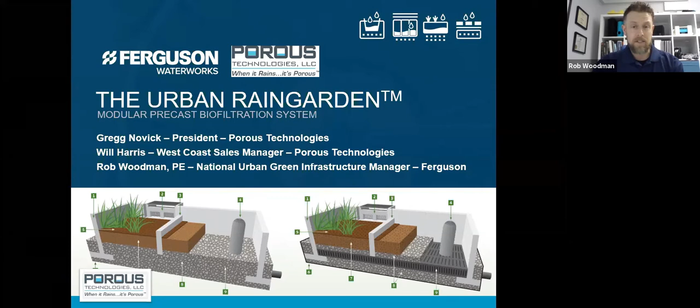In terms of today's presentation, we're going to talk a little bit about what green infrastructure is, chat about some of the typical challenges with incorporating green stormwater infrastructure into urban or city environments. And then I'll hand things over to Gregg, who'll talk a little bit about the great business he's built over the last couple of decades with Porous Technologies.

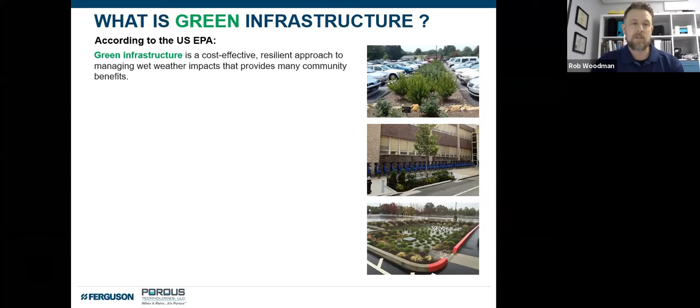According to the US EPA, green infrastructure is a cost-effective, resilient approach to managing wet weather impacts that provides many community benefits. As it sort of compares to a traditional gray infrastructure, when you're looking at conventional pipe drainage and water treatment systems, green infrastructure reduces and treats water at its source while delivering a lot of those co-benefits, or the triple bottom line benefits of environmental, social, and economic.

And then as it relates to green infrastructure itself, generally we're looking at using vegetation, soils, and other elements and practices to restore some natural processes required to manage water and create healthier urban environments. At a city or county scale, green infrastructure is a patchwork of natural areas that provide habitat, flood protection, cleaner air, and cleaner water. But when we think a lot about green infrastructure and the typical techniques, and I guess a couple of definitions for today:

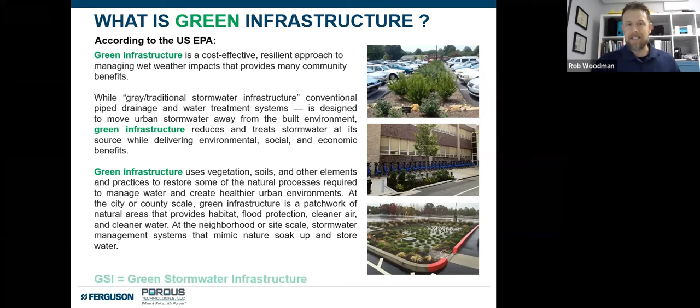GSI, green stormwater infrastructure. And then we use the word BMP, if that's a new one, that stands for best management practice. When we think about the typical techniques for green infrastructure, there's many of them, rainwater harvesting, rain gardens, planter boxes, alleys, green parking areas, urban tree canopies, these types of things.

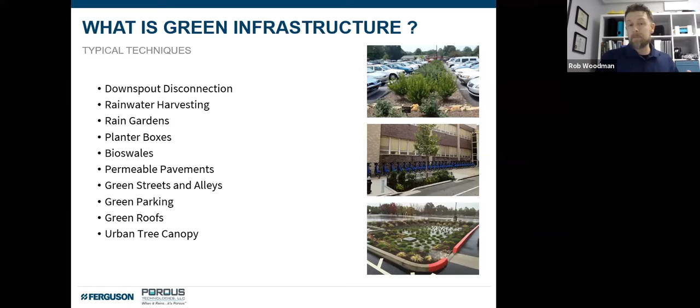And what I've found is that there's a lot of great data sheets out there and guidance for these types of systems, but a lot of them are kind of geared towards either residential applications or where you have a lot of space, but you don't always have a lot of space. When we get into the urban or the built environment, there are a series of complexities that make green stormwater infrastructure a lot more challenging to incorporate.

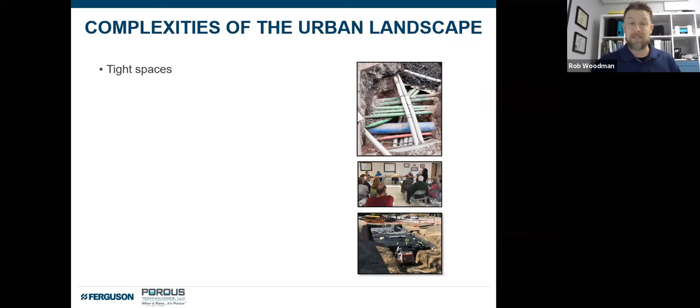You're dealing with tighter spaces, so less room to work, less room to get your system installed and done. You're dealing with working around existing infrastructure, so maybe other utilities and conflicts, or maybe even new infrastructure and utilities that you're putting in at the same time that maybe this green infrastructure system is being deployed.

You may be in a green streetscape where construction may be affecting local business, and where the timeliness or short project cycles are really important, so these businesses can stay open and continue to make money and grow their own businesses.

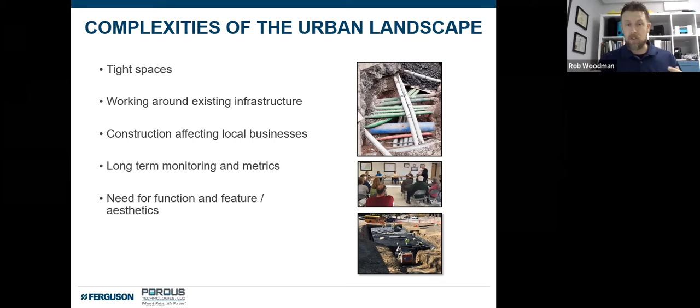And then a lot of these city programs have the need for long-term monitoring and metrics. When it comes to green infrastructure specifically, or surface green infrastructure, there's a need often for these systems not just to be functional—process the stormwater, treat it, or store it and send it on—but also to have that high aesthetic value, to be that feature.

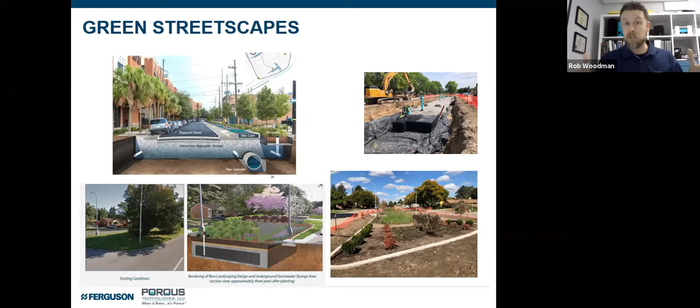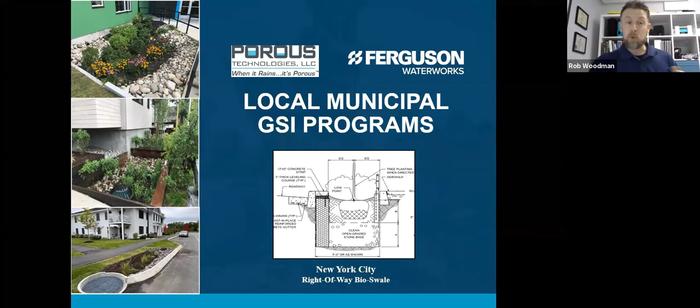And along with any sort of stormwater BMP comes maintenance challenges. Now, every city is kind of doing their own thing, looking at their city right-of-ways, their green streetscapes, and saying, how can we fold these components in? Everybody's embracing them in slightly different ways, and there are many local municipal GSI programs throughout the country looking at green infrastructure in different and some similar ways.

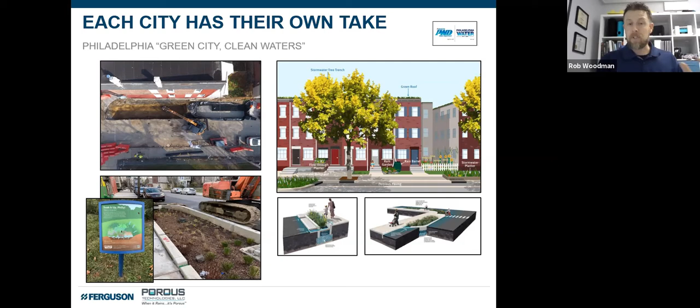When we look at Philadelphia, the Green City Clean Waters program is a very high-profile program that's got a lot of attention. They have a great program with a lot of different types of technologies and BMP styles—stormwater bump outs, deep tree planting areas, rain gardens, subsurface storage pits—these types of things to account for the different challenges from one street to the next.

New York City—I'm sure many of you are familiar with the program there—traditionally makes a lot of use of the right-of-way bioswales and infiltration basins, deploying a very similar kind of look, that patchwork, throughout the city. So, simplifying it into a couple of key options, obviously comes with some challenges associated with curb line BMPs, like trash and debris.

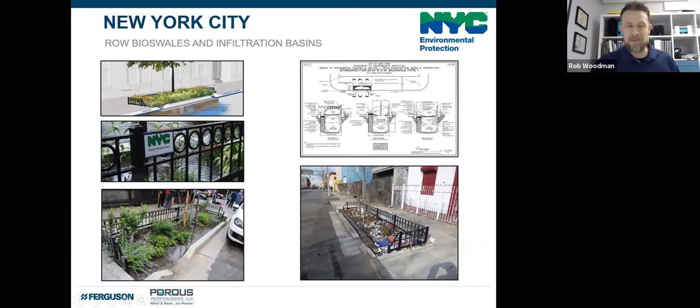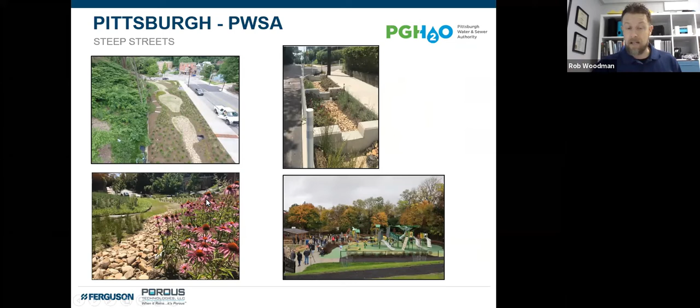Then you go over to Pittsburgh, PWSA, a great little program there on the green infrastructure side. Pittsburgh has the added challenge of having very steep streets, so it's a very different dynamic compared to Philadelphia, where a lot of these BMPs end up becoming terraced with internal baffle walls to separate the stormwater into little chunks as you work your way down the street, in a variety of really creative ways. A lot of folks in Pittsburgh have incorporated GSI features into typical public improvement projects—you can see a really nice little park project here.

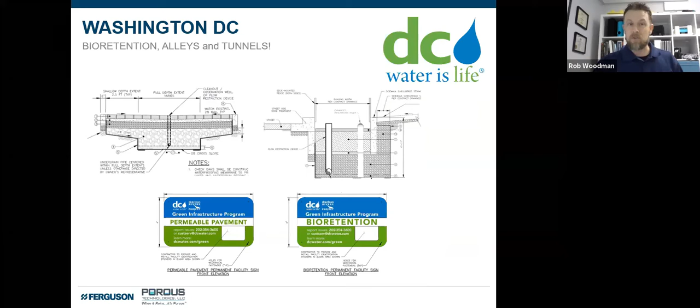And then DC—there are programs all over the world, I'm just focusing on a few today—but DC's primary GSI BMPs are permeable pavement, or permeable alleyways, and also centerline or curb line bioretention systems. So it's interesting to see all these folks navigate different ways to deploy these types of systems in their areas. At Ferguson Waterworks, we've spent a while developing a suite of solutions to address a lot of the key challenges in this space.

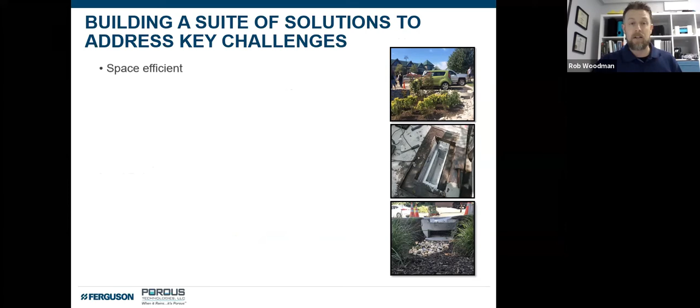So we know that whatever system we bring to the market, we need to be space efficient—that's so important. We need to be versatile and flexible, able to work with site-specific constraints and challenges. We can't be just a fixed shape or size. We need to be high performance, whether that's for water quality treatment or structural performance, whatever that may be.

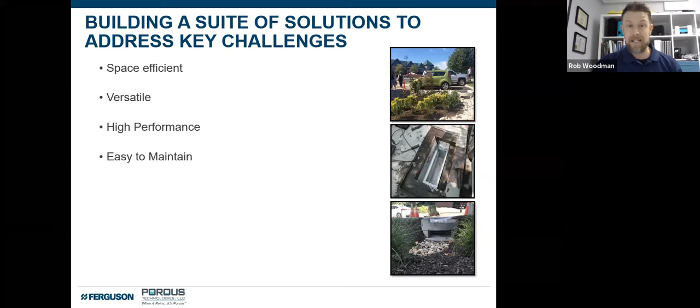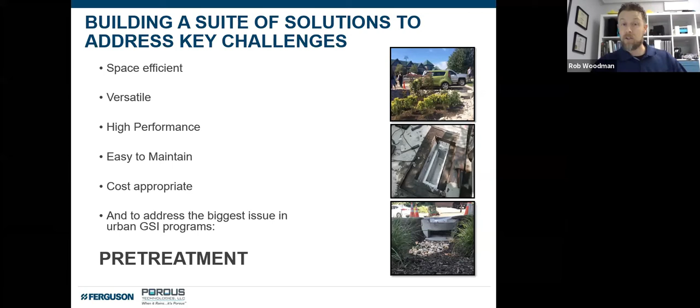Easy to maintain—maintenance is such an important part of the conversation, and Greg's going to share a little bit about his experience and journey learning more about what it takes to maintain these types of systems. And then, of course, cost appropriate. These are the pillars we're working with. The final one, which has probably become one of the biggest things I'm seeing in urban GSI programs, is the need for better pre-treatment to protect a lot of these curb line BMPs so they continue to function, maintenance is easier, and we increase the longevity of the primary BMP asset directly behind that pre-treatment.

At Ferguson, we divide our stormwater products and solutions into four primary categories: space-efficient storage, filters and screens, media and biofiltration, and finally alternative surfaces or permeable and porous surfaces. We're going to be focused on the media and biofiltration segment today.

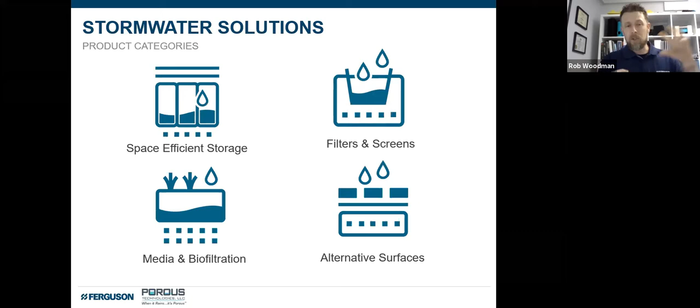When we look at these different buckets that we can pick from as engineers, landscape architects, designers, municipalities, oftentimes folks are just using one, just looking at the storage, just looking at the filters and screens, whatever it may be. But you can also put those things together.

What's really exciting with this Urban Raingarden that you're going to see today is it really emulates a lot of the importance of pre-treatment, treatment, and having all the framework and pieces that you need to have a fully functional urban stormwater BMP. With that, I'd love to hand it over to my friend Gregg Novick to talk a little bit about the great company he's built over the last couple of decades.

Well, thanks Rob. Great job setting the table today on the background on why we need not only biofiltration, but also why we need to focus on the urban setting where we have tight sites and it's difficult to find the space. I'm going to take a step back and give you a history.

I want you folks to know that this product, while it seems very simple, there's a lot that has gone into it. It wasn't developed in a vacuum, and we have a lot of experience.

Through that direct experience working with green infrastructure programs, especially here in the Northeast—I'm sitting here north of Portland, Maine right now—we were able to take that experience and recognize, looking at other GI and LID programs throughout the country, that we've got something that might work all around the country, not just in the Northeast.

So let me talk about the progression. Porous Technologies, we have a couple of companies. We actually have an inspection and maintenance company. About 15 years ago, I started Stormwater Compliance, which is a post-construction stormwater inspection and maintenance company.

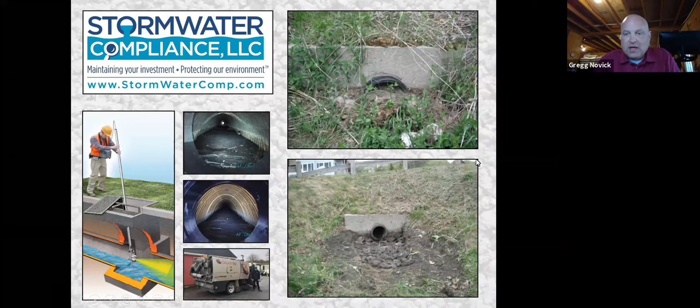We're headquartered up here in Maine, and we've run into a number of customers that call us with issues regarding porous pavement. Porous pavement is becoming more and more popular, especially here in the Northeast, but people are running into issues with it.

So what we did was develop our own maintenance equipment. This is called the Stormwater SUV, a ride-on vacuum machine good for alleyways, small areas, tight areas—we use a Stewart Amos. We also own a fleet of regenerative air machines for larger areas, like parking lots, and for those we use a Stewart Amos regenerative air machine.

We even developed a deep cleaning pickup head that we can place onto the Stormwater SUV that attaches to a Vactor truck. This is a whole other presentation we're happy to do for your office someday, but we kind of became the go-to porous pavement folks.

We never got phone calls saying, 'Hey, we've had porous pavement for 10 or 15 years, it's working great, can you come inspect and maintain it?' We typically got calls saying, 'We've had porous pavement for 10 years, we've never done anything, the municipality finally came and looked at it and said we probably have to rip it out—it's plugged.' So we were able to come in and help them develop methods.

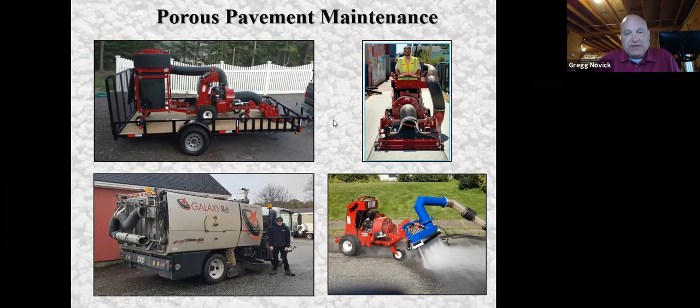So we came up with an idea called Stormcrete, which is a precast porous concrete slab. I'm not going to spend much time, or really any time, talking about this today, other than just to introduce it and let you know it exists.

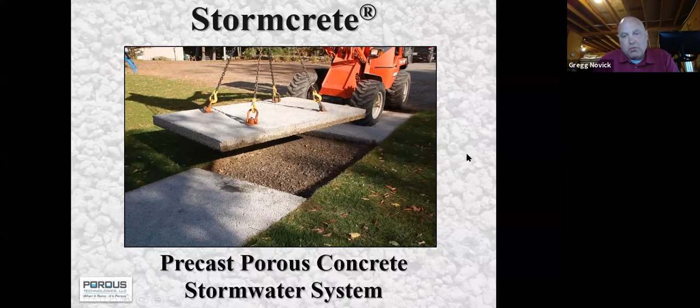Now we're manufacturing porous concrete under controlled conditions in a plant. The slabs have lifting points in the surface and they're removable and replaceable. So between Rob, myself, Will, and the rest of our team, we're happy to come speak to your group one-on-one or as a group about the Stormcrete product.

Of course, with porous pavement, we do parking lots, all the typical applications. Here's an alleyway we did in Anaheim. I like to show these sidewalk applications too—this is some New York City work we did.

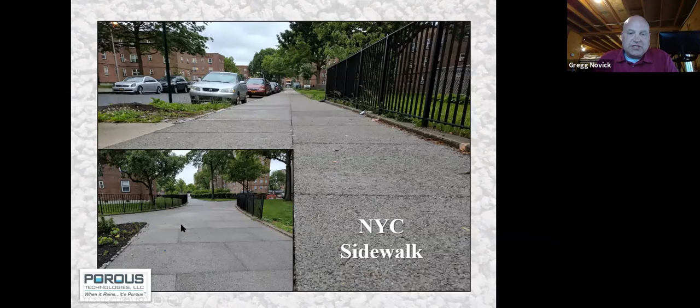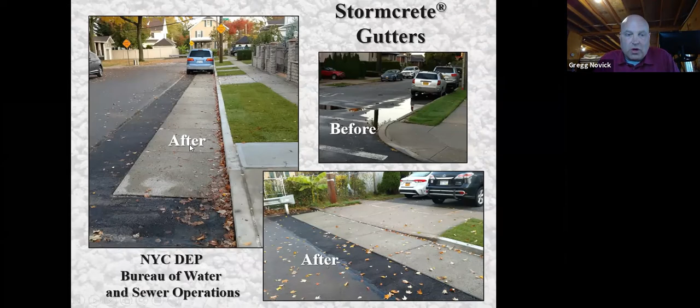This is my lead into how we evolved into a bioswale or biofiltration company. Through all our experience with more New York work, they're developing a gutter line application. They're starting to run into problems with conflicts in the sidewalk behind the gutter line, so now they're looking within the right of way for ways to get rid of their stormwater, looking at porous pavement. We've spent 10 years working with New York City in their GI program, and they've even developed a standard for precast porous concrete pavement in the gutter line.

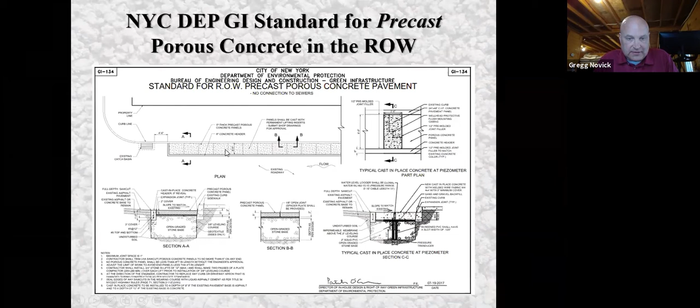Through our experience working with contractors, getting demonstration projects and working with the city, we were very involved in the entire green infrastructure program in New York, and recognized our contractors were struggling in the field pouring these in place. They now have about 8,000 to 10,000 assets built in New York. They had contracted to build hundreds of bioswales in a 9 to 12 month period, so they were challenged. We recognized the issues and developed a solution.

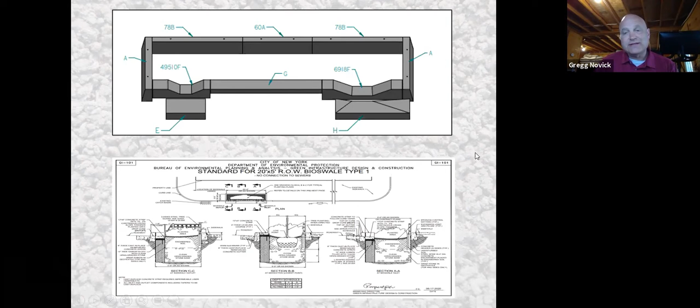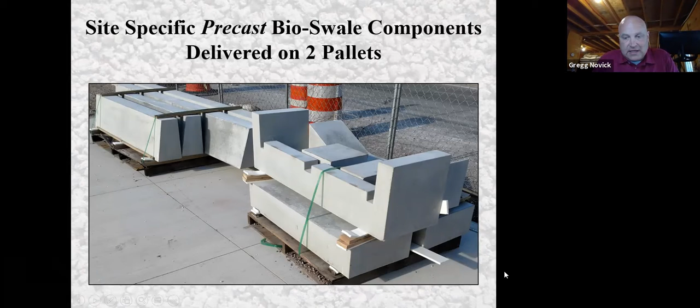We actually precast all the parts to the New York City bioswale for them, and the contractors liked it. We ended up supplying thousands of these into New York City over the last few years. We have the advantage, and the contractors liked that we were able to palletize and place all the bits and pieces on a couple of pallets for a bioswale, and they were able to just assemble it in the field.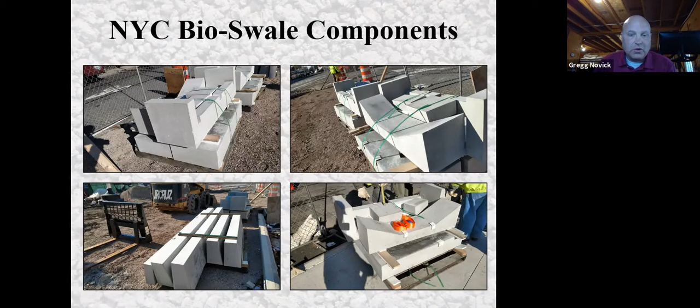Again, these are live streets. These are retrofits, and they need to get these streets open quickly. You've got these open pits until they get the concrete in and cast in place and cured, so if a storm comes through, you've got these open holes. By going with precast, they were able to install and close up the hole very quickly and get the streets back open. This really turned out to be a great thing.

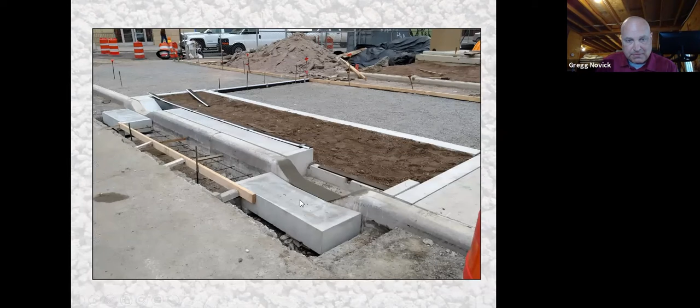We had the advantage. Here's a couple more pictures in New York, showing some of the parts we provided. Other than the curb here, we provided all the precast pieces for the bioswale.

So now we started looking around the country and said, hey, we know what's going on in New York. Here's a picture of New York's design, but now we're seeing others where we've got these straight walls. New York had straight walls initially and started having issues with settling and the walls tipping a little bit, so they flared out their walls. A lot of these other designs really just have straight walls. We had the advantage of being able to study all these different systems, and we kind of took the best of a number of worlds.

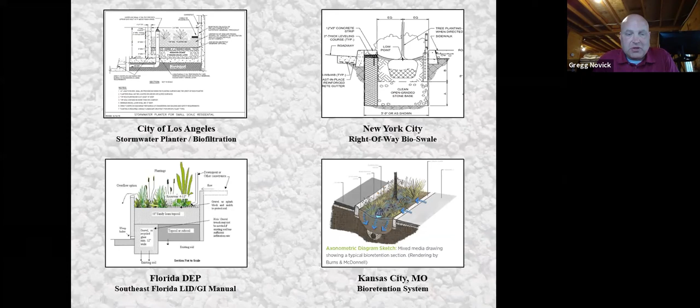We looked at Los Angeles, we looked at New York, and figured we want to make sure that whatever we do will fit into that. Lo and behold, once we designed it, we realized it works for just about every municipal LID or green infrastructure manual with regard to their biofiltration systems, or some people call them planters. So the Urban Raingarden was born.

With the Urban Raingarden, what we've done is created our own wall. We'll get into the details, but we've created a T-wall so that we can resist any settling or tipping. We have knockouts within the wall to allow roots out if we're using it for trees. There's a number of features that Will's going to go into right now.

I just want to give you the background that we've been doing this a long time. We started with a maintenance company, and with an eye for maintenance, we recognized the need for pre-treatment, like Rob discussed, so you can concentrate all the pollutants in one location and have one easy place to clean them afterwards. Through all our maintenance experience, we kind of developed that porous pavement product, and from that it morphed into a second porous product for us called the Urban Raingarden.

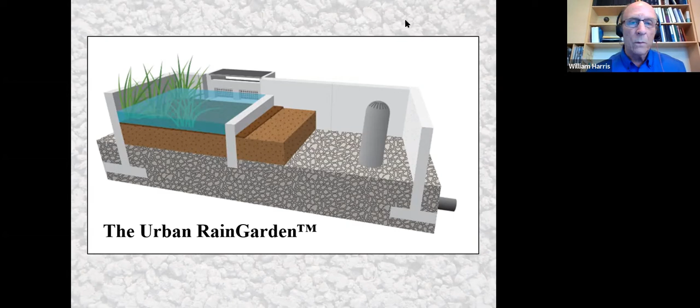So a little bit about the Urban Raingarden, let me get rid of this screen up here for a second. I'm going to take you through the features and benefits of the Urban Raingarden, and a little bit about the West Coast perspective as well, so you can gain an understanding of how this system was developed and why. The primary purpose of the system is to give and deliver a system to an engineer or contractor that's simple to design, has different options, and is non-proprietary.

This system can be applied in any jurisdiction across the country, as Greg alluded to, as something functionally equivalent to all standard types of bioretention system designs or guidelines, whether it's in the city of LA, LA County, the San Francisco Bay Area, New York, or Virginia. The beauty of the system is that it offers a number of different options that I'm going to take you through briefly.

One major option is the precast T-wall sections, which we'll get into in more detail in a moment. Also, as Rob mentioned earlier, as well as Greg, one of the major issues and challenges around maintenance for any rain garden system is treatment, pre-treatment, and maintenance.

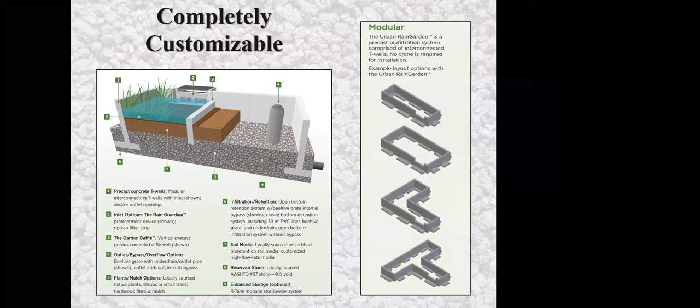I think you may have frozen. How's that? All right, we're in the interconnecting wall now. Is that where we want to be? Yes. Okay, good. I'm sorry.

Okay, getting back to the interconnecting T-wall—this is probably one of the major features of the Urban Rain Garden. The T-walls we design are precast concrete walls that are 6 inches thick at the top and the edges, and on the bottom we have an 8-inch base, so that it can offer a very stable location. They're connected by a turnbuckle, which allows for different configurations and allows the walls to be interconnected.

The footings actually prevent any type of settling, which is why they're 8 inches thick. There's no crane required, so it makes it very simple for a contractor to place the T-walls in the ground.

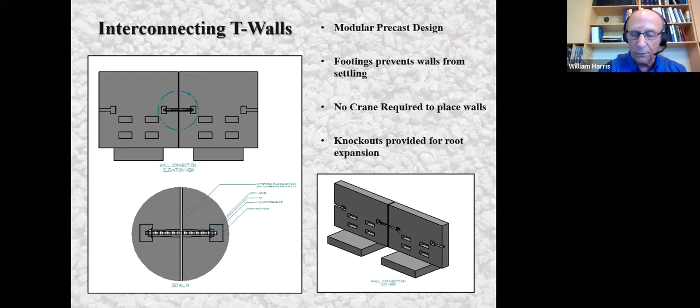We also offer the option of knockouts for the allowance of larger trees or shrubs for root expansion, or if you don't want to use the knockouts, we don't have to create them either. The walls actually come in two different sizes, four feet long and six feet long, and they can either be three feet high or four feet high, so that your dimensions and sizes are not dependent on having built all these different sizes of walls.

Using two standard sizes makes it very easy to design any shape, length, width, or size of system that you desire. This is showing an illustration of the interconnected T-walls placed on a radius, so you're not limited to having to make a rectangular type of design or a box design.

If you want to create a radius, you can do so with the actual interconnected T-walls. We do have an example of a general detail here, but this is not the only detail we have available. We offer free engineering support services at Porous Technologies, and we want to work with the engineering community so that we can provide them with a design detail that specifically fits their particular project application.

With the Urban Raingarden design, the basic design features are shown here, so that if you wish to incorporate an enclosed system with an underdrain and also with a beehive, you can do so, or we can leave it without. All of these other optional features will go through that being incorporated in a final design, but we do have general design details.

We also have a sizing guideline available for engineers to review that can then allow for the actual sizing features to be able to capture a particular volume or flow that may be required for capture in that jurisdiction. Those design details can be provided by us as long as we have the basic information on what the volume capture requirements are for that particular location, or if you have a site plan that we can work with and provide you with that particular design.

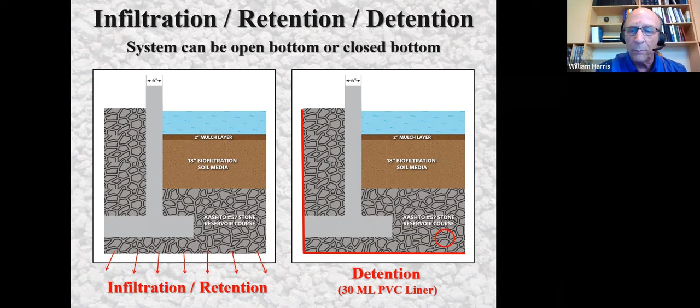We're just showing 18 inches here as an example, very typical of a lot of locations around the country. But if you want to make your biofiltration soil layer 12 inches or more, or 24 inches, you have that ability to do so. And then, of course, your mulch layer goes on top. Your ponding depth can vary as well; it doesn't necessarily have to be at 6, 9, or 12 inches. It all depends on what your site conditions are and what the local municipality allowance and limits may be. So we give that complete latitude to the engineer.

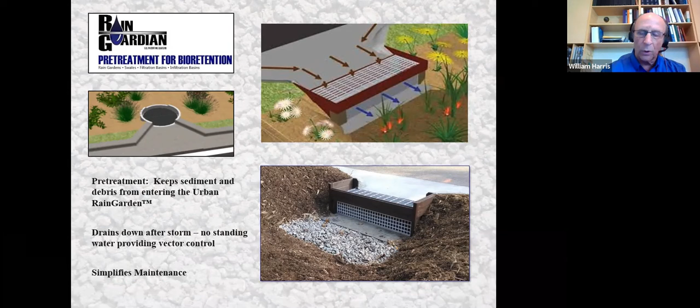Rob mentioned earlier about the need for pre-treatment. We believe that is really a strong philosophy that we incorporate into the Urban Raingarden. We actually offer a device called the Rain Guardian, which is a pre-treatment device for bioretention systems generally, from a company based out of the Midwest. We distribute their products on the West Coast. The Rain Guardian is a great pre-treatment device for capturing gross pollutants like trash, debris, and sediment.

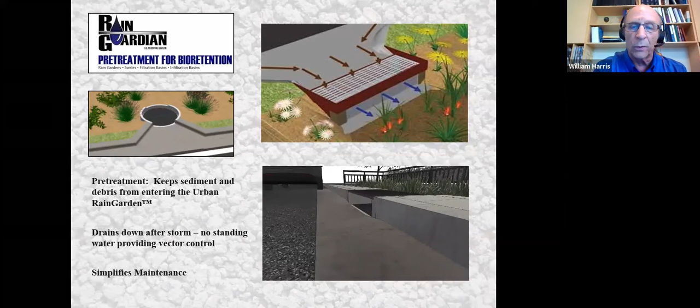It can be incorporated upstream of the Urban Raingarden so that as flows enter along, let's say, a curb line, you'd be able to convey that water through the Rain Guardian first, so that the trash, debris, and sediment—gross pollutants—are captured initially before water can continue through a filter screen and go into the actual Urban Raingarden.

This is a great feature for those who are concerned about maintenance of a planter system. Here, you'll be able to incorporate a pre-treatment system that would be able to be maintained right there at the curb line or in a parking lot area at the entry of the rain garden itself.

The garden baffle. It's something that we invented at Porous Technologies, and Gregg Novick spent a lot of time in the design of this. This is basically taking a standard stormcrete precast porous concrete panel and turning it vertically, and once turned vertically it can then be incorporated really as a baffle wall.

And the nice part about it is it's a porous baffle wall, so the water can weep through the actual porous wall itself as it drains down. So it allows for the system not only to be used as a forebay, a detention area up front in the planter, but it will also allow for all that water to drain down at the appropriate depth and time. You can set the ponding depth for this, as well as for the bypass.

But what's most important is that it will allow for the even distribution of water over the entire filter surface area, and thus eliminate short circuiting.

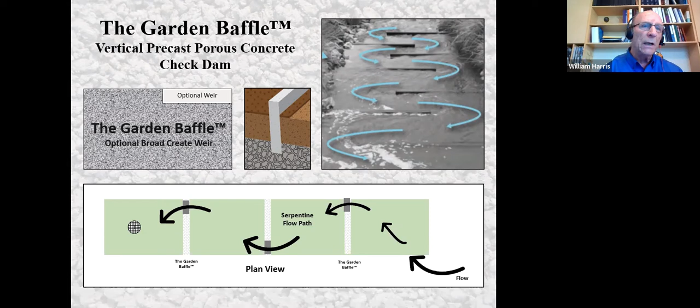Here's a good example of how it can be used in creating a serpentine flow path. With the baffle walls on each side, you're able to allow for that water to cross all the way through, thus preventing rutting. Rutting is a major problem with a lot of planter systems currently operating throughout the country. To prevent that rutting, you can use the garden baffle, which is a significant benefit for those concerned about the longevity of rain gardens.

In terms of placing these on slopes, this is really where the garden baffle plays a key role as a check dam, allowing water to easily and gently flow through the system rather than rush down a slope.

Again, every single project that we work with engineers on is different, so there may be a different slope and a different condition, in which case we can help the engineer design the system so it has the appropriate baffle wall materials.

So getting over to all these different options I mentioned earlier, there are a ton of options, and you're not limited to having to use a particular type of design. You can make this a closed bottom or an open bottom.

If you're going to incorporate an underdrain system and you need more storage, we can incorporate an R-tank modular detention system underneath the bioretention soils. We can incorporate the garden baffle, even fencing. All these materials are available with Ferguson, and they're a great distribution line across the country.

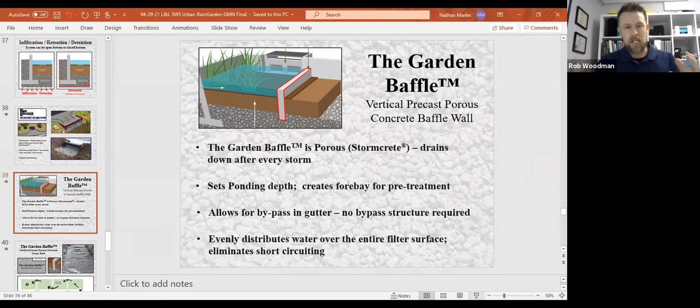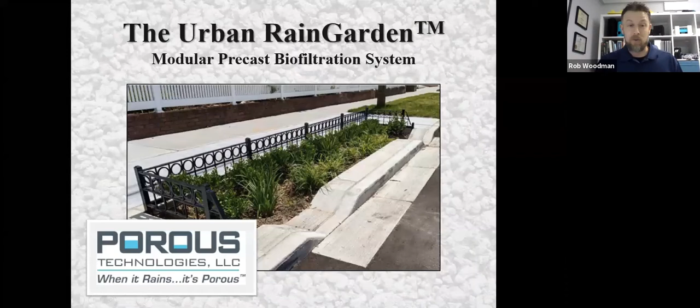Essentially, we're not providing the media. We're not providing the mulch. There's a couple of questions on the mulch too. We're providing this T-wall system with a lot of really cool accessories, whether that's the rain guardian for pre-treatment, the baffle wall for the forebay or serpentine patterns, or the domed overflow potentially for internal bypass flow. But the beauty of this system is whether you have a media that you like using or a media that you're required to use, whether it's a state standard or a local municipal county standard, you can build your local rain garden or bioretention section into this system. We're just providing a very convenient modular formwork or framework or border to that. I use the word skeleton - we're providing the skeleton, and you're going to put your biofiltration system that works locally for you in here.

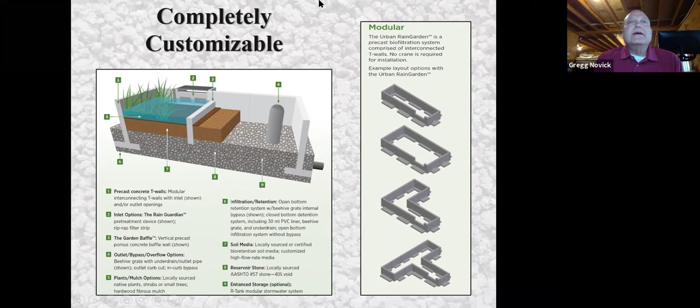We can adjust the depths. We can adjust the storage volume. We can adjust the soil media. You're going to use the local soil media that's called out in the local LID or green infrastructure manual. You're going to call out local plants. Somebody said they recently saw a presentation where you shouldn't put trees in the middle of it - then I suggest not putting trees in the middle of it. It's up to you, it's your design. You pick the type of plantings, the type of material that goes in, the media. We'll just provide all the engineering that goes behind it, that goes in with the baffle wall.

A few questions around the porous baffle wall. We're taking a StormCrete panel that we're used to putting in the roadway, in the gutter, in live streets in New York City. Now we're turning it perpendicular and putting it in a rain garden. We do pretty well in the streets with regard to plugging. In this application, if any sediment were to be on the face of the wall as the water level drops, the sediment will drop off and slough off with it. We have something like a 1,000 inch per hour flow rate for these panels when they're brand new. It will be a long time before these panels need any real maintenance. That said, a simple pressure washer right on the face at the surface there would take care of it, so it would be easy enough to maintain.

We had a question - we do have a functionally equivalent approval with the porous pavement in Washington, and we're just about ready to get our functional equivalent approval from Washington DOE, which kind of reinforces the point. Like we said, we're just taking our skeleton and sticking in the Washington State DOE rain garden or biofiltration, or I think they call it a planter out there - so it's a street planter that we're getting approval for. And lo and behold, they asked us to come back and take a second look at their surface sand filter design, and we can configure this as a sand filter as well, housing all the different parts and pieces, and again providing pre-treatment for the sand filter here at the front end.

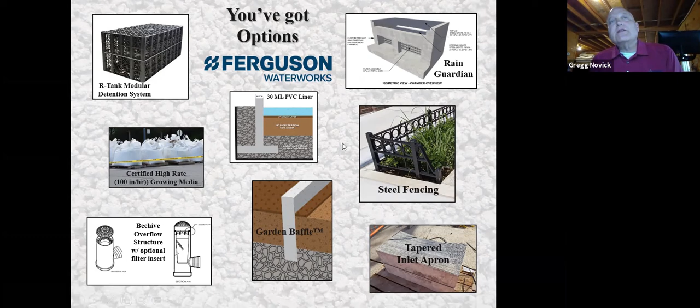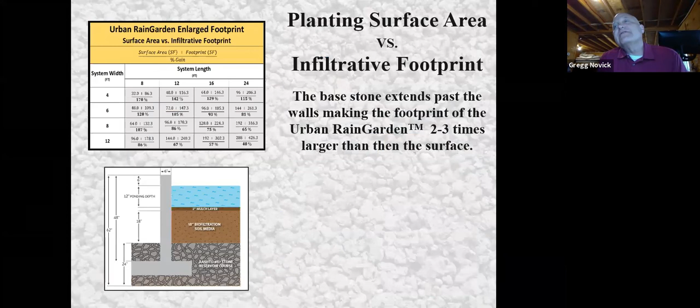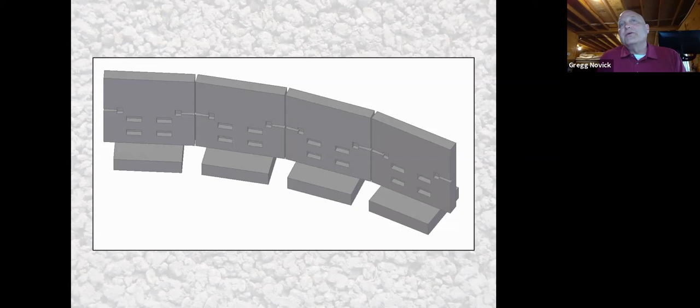The outside of the wall is where we get a little bit of separation. Obviously, this is just a schematic. We have a full detail on how you handle that space that's left behind in that radius, and we can work with you depending on the configuration, how we would finish the system on the radius application.

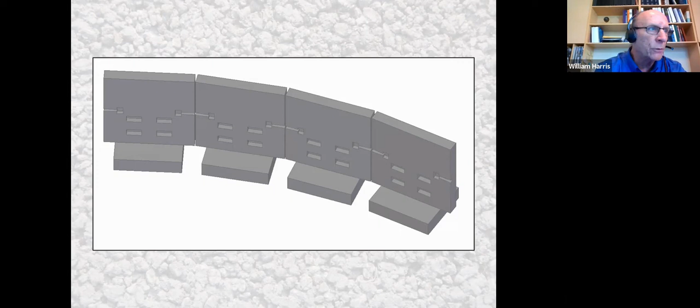One of the other questions I saw was, are the T-walls available locally in terms of locations? Yes, these are precast on the West Coast, the East Coast, and in different parts of the country. Wherever we manufacture the precast walls, they would be shipped locally. We're not going to be shipping T-walls from Maine all the way out to California.

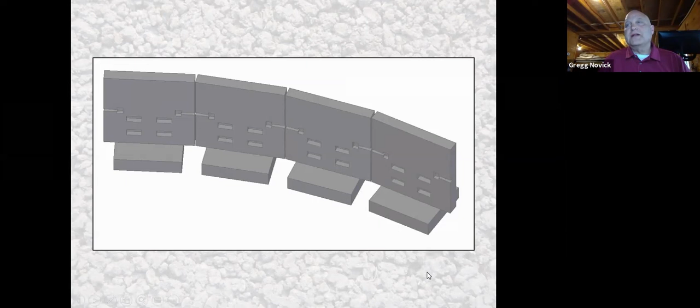So any other questions that you see there, Rob or Greg, need to be answered? There's been a bunch of questions about the garden baffle, which is great. Questions around clogging issues with the porous wall: if it does get clogged, how do you restore the porosity? That's kind of a combination of two questions.

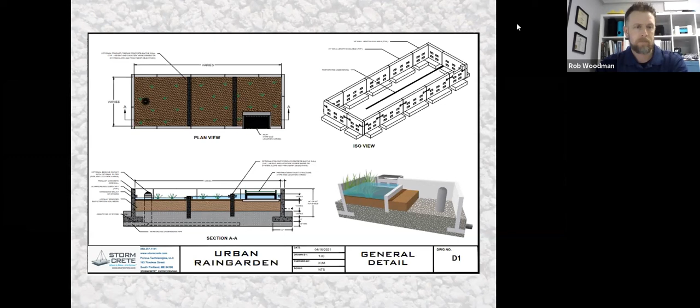Well, there's a number of answers. First of all, we're used to seeing these in a horizontal application where we're being driven on by cars and vehicles, and we're working material in, and we still see porosity. Remember, this wall is not meant to be a filter. It's not designed as a filter. I don't think you heard us call it a filter.

Did we? I don't think so. I never call it a filter. This is meant to be a weep wall, so it's meant to drain down. We're talking about a small area that will drain down over an hour if need be. Even when the slabs are plugged, they still flow at a 5 to 10 inch an hour rate, even when they're plugged. The sand within the pores will still allow water through, so these things will drain down over time. They will not become a vector issue.

That's the whole point. So if the surface area of that forebay becomes plugged and doesn't allow water through, our weir wall will. If trash is pushed up against the wall, we're not flowing through like an open outlet or an inlet; water is just pushing through. In the end, all the pollutants should slough down and off of that wall, keeping it open and free. In a worst case scenario, a pressure washer at a 45-degree angle just on the exposed portion of the wall will bring it back basically to new.

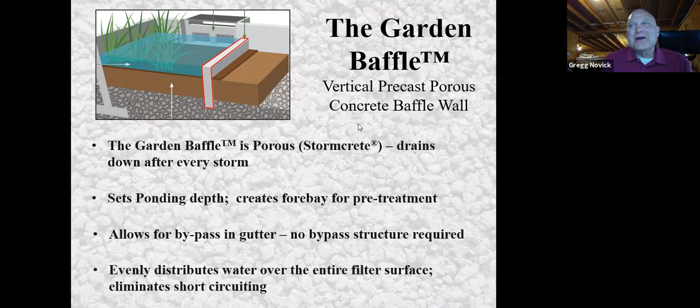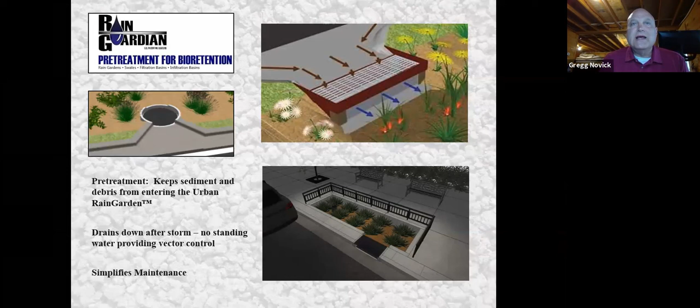Under a worst case scenario, just like our panels in the ground, we have lifting points, and everything we do is removable and replaceable. So the porous concrete slabs are removable and replaceable under a worst case scenario out in the gutter line. If all else fails or something unforeseen happens, same thing with these walls—we can always pull one out, get it back in, and put everything back together again, peeling the media back a little bit.